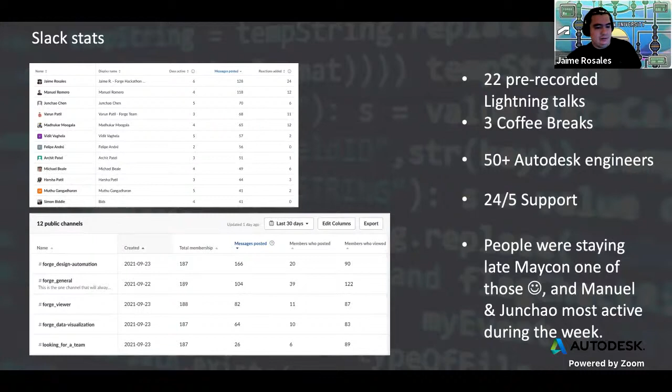Some people were staying late, Maycon being one of those. Maycon is based in Brazil, and I saw him working with Xiaodong, who is on our China team. Good job, Maycon, with that. Also among the most active ones of the week, I saw Manuel Romero and Junchao Chen. They are from the Apogea team. Good job, guys, during this week.

Okay, so a little bit about Demo Day. Demo Day, basically, it's kind of quick and simple. I'm gonna ask — we have around 8 teams presenting today during this time slot — so I'm gonna ask you to keep it short and concise. But the main idea is to introduce your team, your teammates, and at the same time,

the most important one, tell us which challenge you ended up picking for the application you worked on, what you were able to accomplish, what you like and dislike about the hackathon format, and how we can make it better. Don't worry about it, we have tough skin when it comes to this. We'd like to improve every single time we have one of these virtual events. So please let us know what you thought about it.

And then last but not least, a quick demo of your application. I'm going to ask all of you to try to stay ideally within the 5-minute mark. So go directly to the point: tell us your teammates, challenge, demo of the app, and then the rest.

Since this is a competition, you're going to be competing for some prizes. So this is a little quick preview about what prizes we have for the winners today. The winners are not going to be selected today — we're going to go through judging criteria tomorrow with the judges, and then we'll be selecting the next round participants, who are going to be showcased during AU on Tuesday, October the 5th.

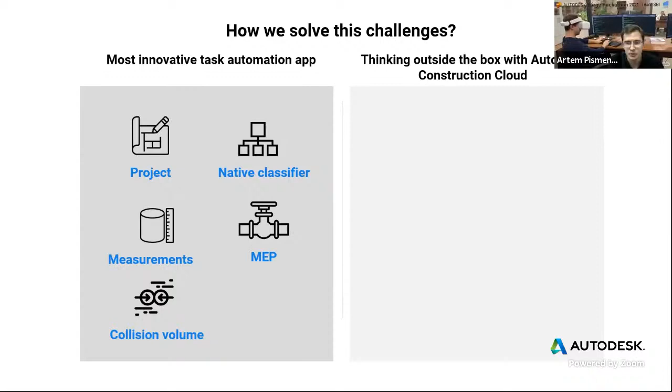We also assign collision parameters such as intersection volume, and the processing creates surfaces to calculate finish by room.

For the second challenge, we developed a tool for comparing consolidated models. It can create consolidated models from the required Revit files and quickly analyze qualitative and quantitative changes between project versions.

To solve our problems, we used the following Autodesk Forge APIs. For backend, there was Revit API, data management, model derivative, and design automation. For frontend, we used Viewer API.

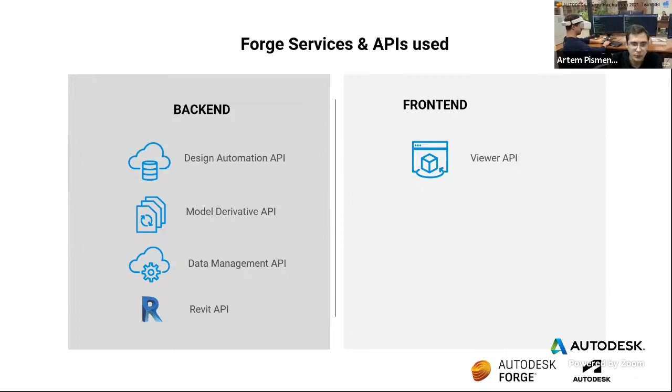Our workflow divides into two stages. In the first stage, the model selected from the source folder in BIM 360 is transferred through the data management API to the design automation API. During this processing, parameters are assigned to the model.

The elements of the model are assigned parameters which are further used to verify the correctness of quantitative parameters and classification of model elements. After processing, the files are placed in the process folder.

In the second step, the selected models with multiple versions in BIM 360 are transferred to the data management API and the model derivative API, which allows the comparison tool to work with metadata and perform comparison. Then comparison results and model data are transferred to the viewer API and dashboard.

Next, we'll show you a demo. We pre-recorded it, so let's start.

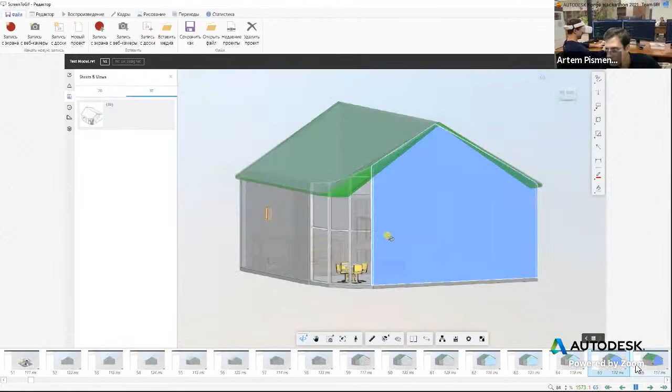So we have a model in the source folder, test RVT, and we're showing you that this model doesn't have any generic models and our parameters.

On different stages, this model doesn't have these elements.

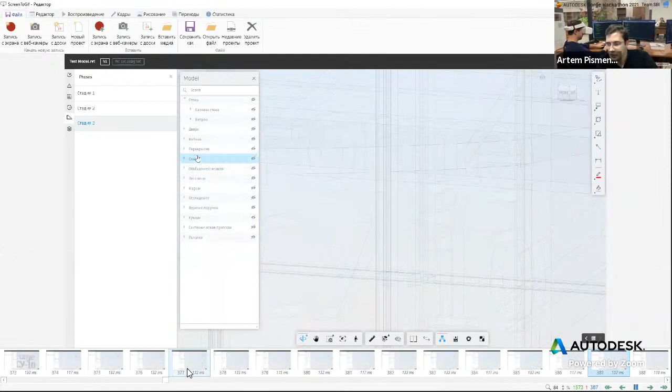So the next step is to start processing. We go to the same folder, pick our model, and start processing.

After a few moments, the process is complete, and we have the processed model in this folder.

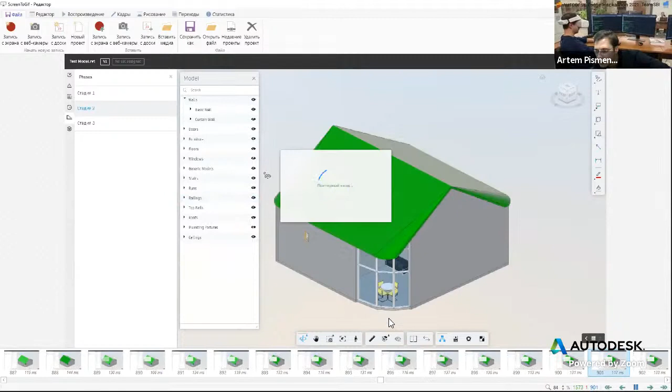And as you can see, on the third stage, we created collision elements which have volume and other parameters.

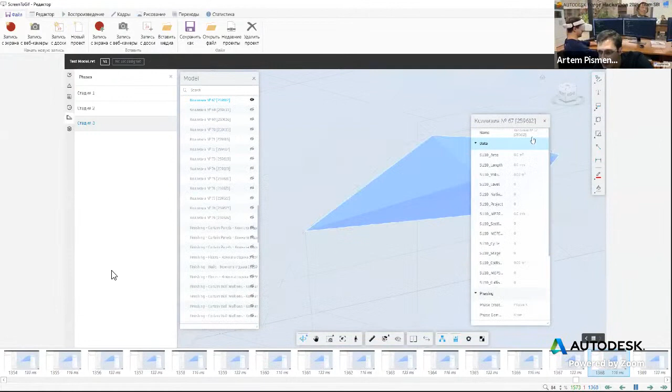Also, we created finishing elements which we can use to create a bill of quantities. So that was the first stage.

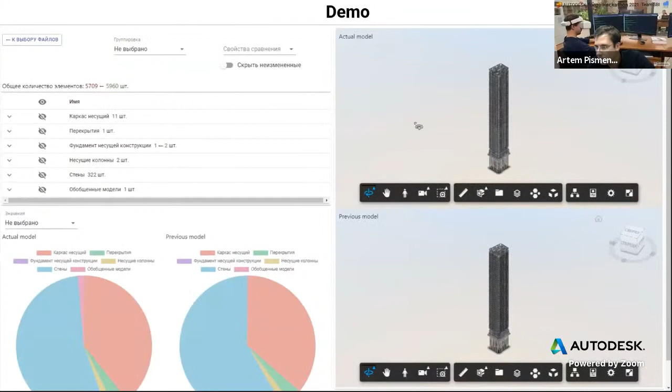At the second stage, we will demonstrate a real project. So we chose two versions, and here it is, our comparison tool.

We chose the volume parameter to show how it increased. We also chose this parameter in the dashboard to modify it.

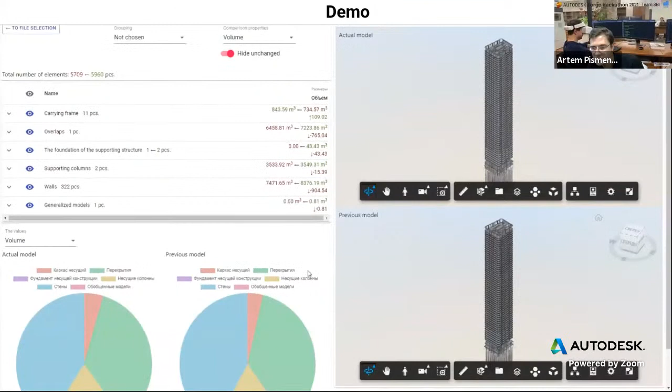As you can see, we have elements that don't change between version 1 and version 2. For this issue, we created a kind of changed filter, so if you click this button, our tool hides all unchanged elements and you can see how the volume of different categories changed.

You can also go to two dimensions and see changes there as well.

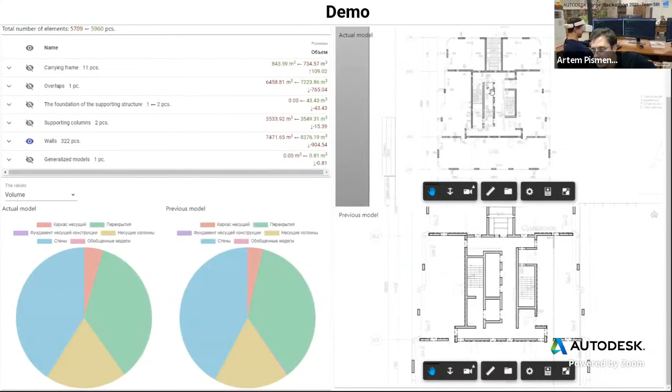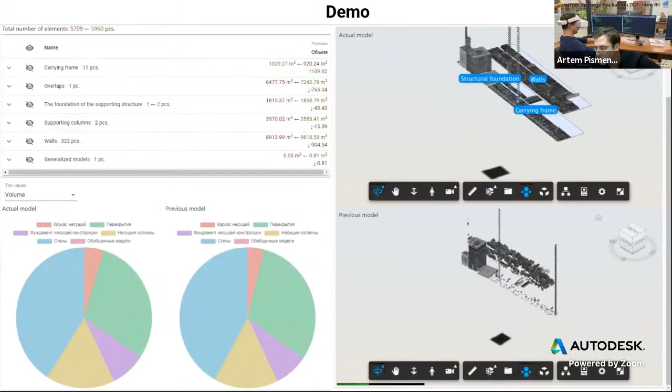We've also added a form cluster function. Using this function, you will be able to correctly identify which elements changed in different categories.

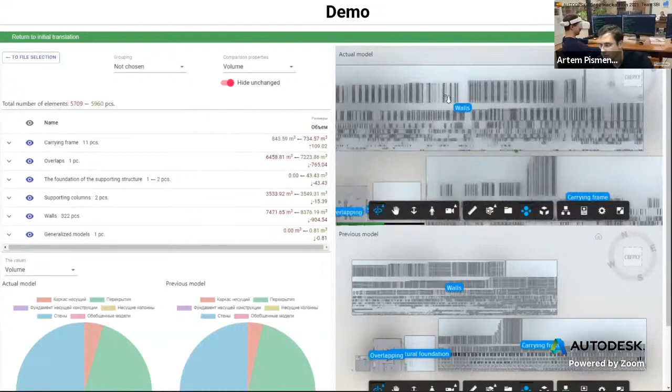The next step will demonstrate how our tool can make merged models from many Revit files. As you can see, there are many files.

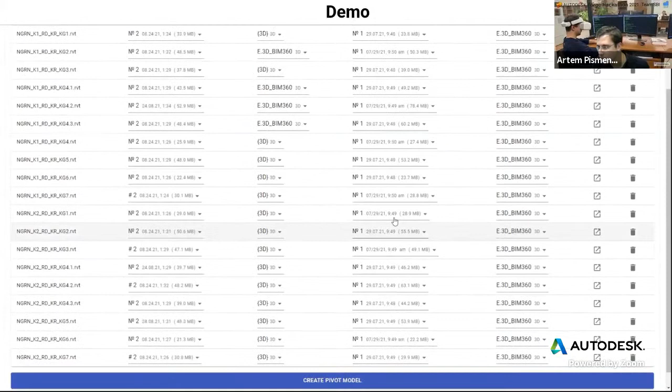Our tool combined them into one solid model, so we'll be able to analyze changes between many models.

There are a lot of elements in this model, so it takes a little time.

Our dashboards are interactive, and if you click on a category on the dashboard, this filter also works in the viewer.

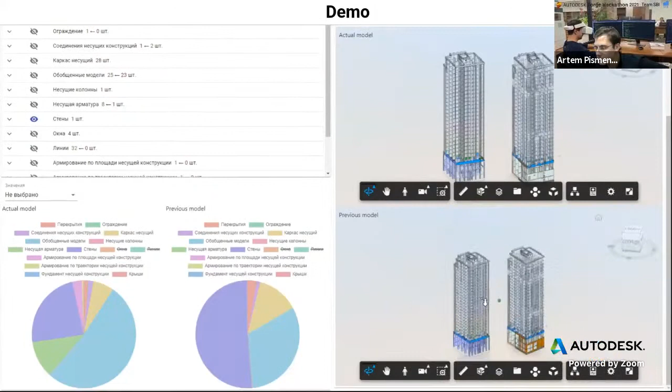You can add multiple data to analyze, and we think it's very useful. So I think the demonstration is finished.

To make this project, we used the following technological stack. For front end, we used JavaScript, Redux plus React, and Autodesk Forge APIs. For backend, we used Node.js and PostgreSQL database. For BIM, we used C#, Revit, and BIM 360. We also used services such as Jira, Slack, Figma, and GitHub.

The problem we're solving is difficult workflows, because it takes a lot of time for the formation of bill of quantities and verification of changes in the project during the tender stage.

Also, we solve the problem of lack of necessary parameters, because at the tender stage, the designer provides a BIM model of the project without necessary parameters, and for correct analysis of the project, we can add them.

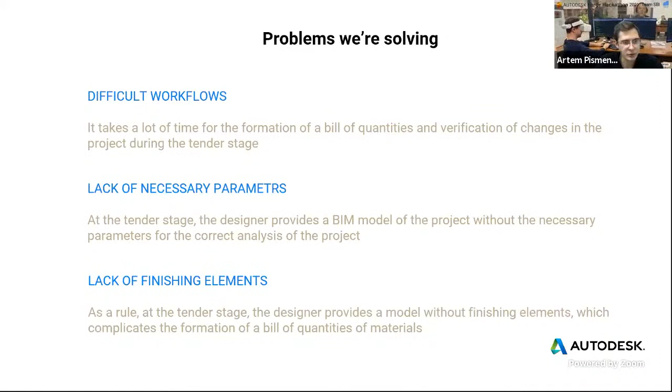Also, we have other benefits like autonomy, because using our tool, you no longer depend on the designer and can form a bill of quantities even if the model doesn't have necessary parameters.

Next benefit is an all-in-one compare tool. Our comparison tool also allows you to analyze both quantitative changes in the volumes for different categories and qualitative changes of a single element. The tool also erases boundaries between 2D blueprints and the BIM model, so you can work as you want.

Last benefit is interactive dashboards, because interactive dashboards built into our service allow you to quickly perform a visual assessment of the quantities relationship between the selected categories and quickly make decisions. Thank you for attention, and we're ready for questions.

Quite a lot in a week. Awesome, Artem, good job. Do we have any questions for Artem?

If people are being bashful, I have a question, Jaime, or for Artem. Go for it. Pardon if this is a little too straightforward. You clearly have done a bunch of work before this week. So how much did you do this week? Because I'll tell you, Artem.

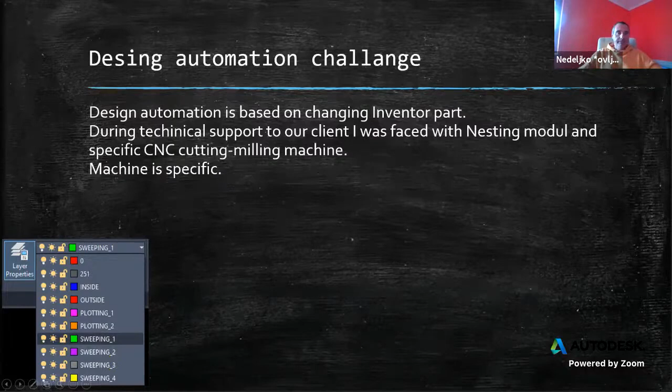On the other side, we have the nesting, which is also specific. It's good, but there are rules that must be obeyed. If you want to nest something on the table, nesting will first search from the bottom and look for the first free sketch. If there is no free sketch, it goes up and looks for the first extrusion, and takes that sketch for the nesting.

In this example, this green sketch is used for that extrusion. It means only that geometry will be taken in nesting. This arc will not be taken, and that is a problem. When you cut, you will cut it here, and that is not what we want.

So this Forge application will be a bridge between these two worlds. So what is the main idea here, and what is the challenge?

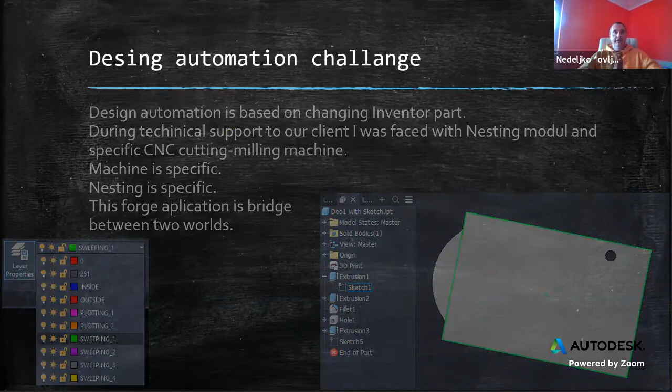A plugin for Inventor is okay, it's not a big deal. For me, it's easy after 10 years of programming and using Inventor. But the challenge is to use a viewer, to allow the CNC operator to use the Forge viewer to pick the edges, select the technology for those edges, and then send that to Forge and receive the complete model data back.

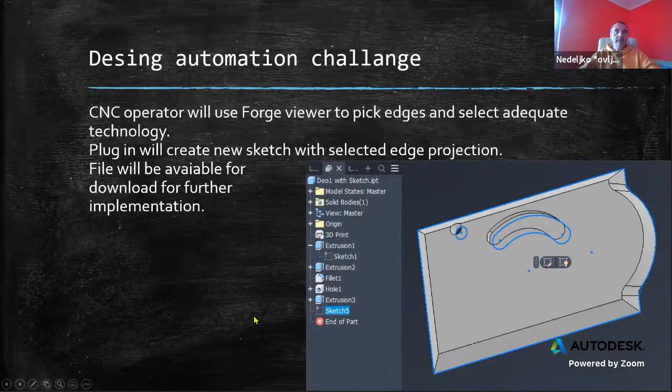So the result must be like that. In this free sketch, this geometry must be projected outside for the sweeping geometry, and this geometry for drilling. So I will start now my application to show what's going on, and my application is here.

So it's very easy, log in. Inside, I will take this project, edge classification config, or we can create a new one, but we will work on this demo project. First, we have to upload the file and extract edges. That will be done on Forge.

Now we have our model. We'll start the translation, I'll just leave it. I should remove it, but it's done better. It's a very simple model and it will be very quick. So this is our model.

Next step is to download the edges, calculate those edges, and we will show those edges here. So the operator needs to recognize edges, and which edges go with which technology.

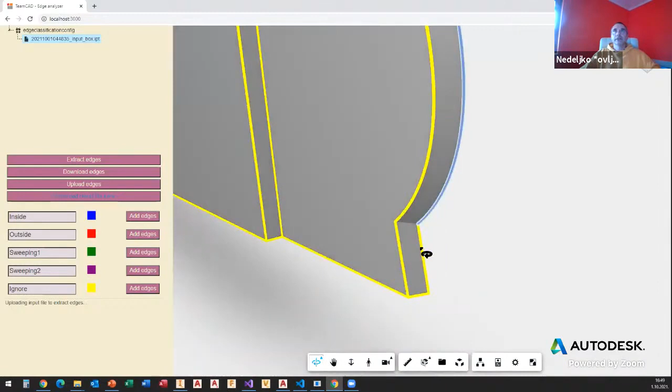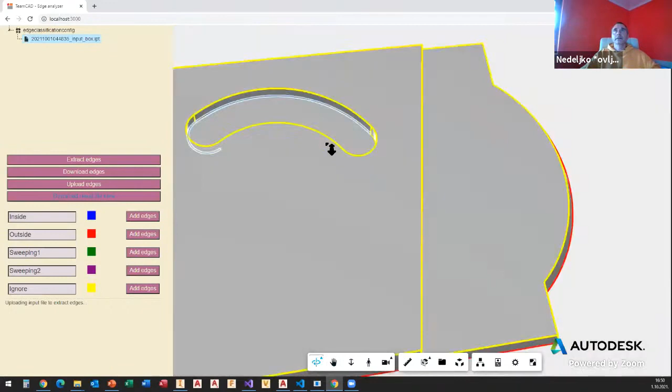We will collect this edge, that edge, that edge, and that should be outside. Another thing, we should collect this edge and take it as an inside edge, and here we will take this edge. This piece here, this one, and that should be sweeping one.

Sweeping one is milling inside that contour, sweeping 1. And here is the last edge or last contour that should be selected. This one and this one, that is sweeping 2.

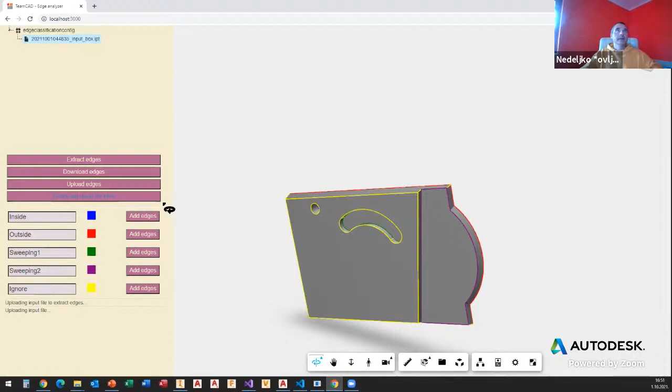Now the model is ready to send back to Forge and create a sketch according to this selection. And here we can download it as a part. I will open it, I should bring my Inventor on top. Open. And this is the last one.

So here is our part, and this is that last sketch with contours. What is important here is the color of these contours, because based on that color, we will create the DXF file and put these contours on the adequate layer.

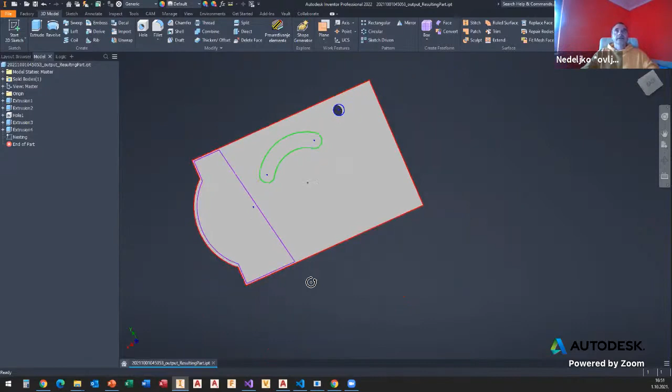So it's very simple now. We will create a nest. I will use millimeters.

Source file, okay, I accept that as a source file. And now I'm going to create nest study.

Nest study is here, 28 pieces, it doesn't matter how much. And here it is. Nesting, just recognize that contour is inside, but it doesn't matter. We will not cut in nesting.

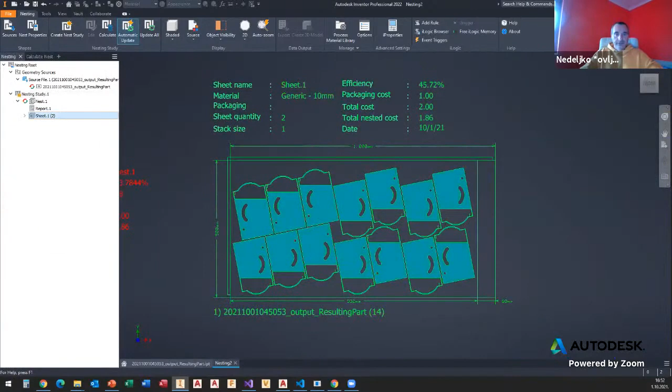We will first go and export this sheet in DXF format, for example, in AutoCAD here. I will use my configuration for that. And that is now exported.

So now it can be opened in AutoCAD. This is that one file. And we'll see each contour kept the color.

That color we will use to put that geometry on the adequate layer. This layer is 0, so should be sweeping 1. For that purpose, I create here a command, and after that...

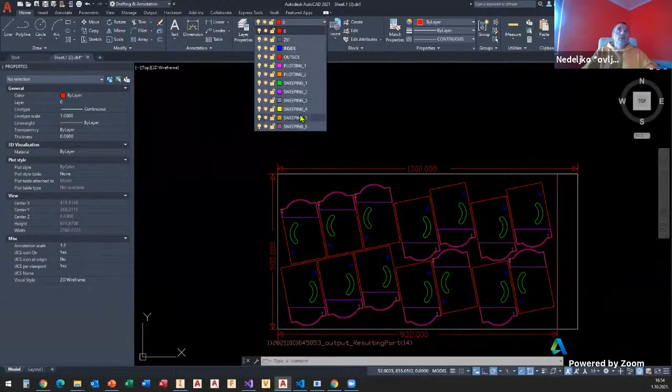Layer manager is down, okay, I can open from here. Now we have all layers, what is necessary for production, and each of these geometries is on the adequate layer.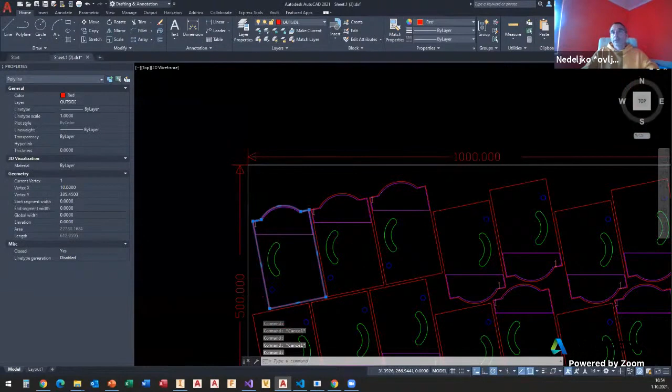Now there is no problem for production, and the machine will understand what sweeping 1 means, what sweeping 2 means, and here is the inside and outside contour, and everything will be perfect, I hope so. We will see, because that is live, that should be integrated to our client, and we will see, I hope, the best.

That's it, what I have to expose here. I want to save the time for others, but if there is some question, I'm open.

There's a mix of different technologies going on here, which is actually quite interesting. Do we have any questions for Nedeljko?

I have one. Can you hear me? Yeah, yes, I can hear you. Login based on Forge Client ID and secret - is that just for demo, or do you plan to use that? It's two-legged authentication. Yes.

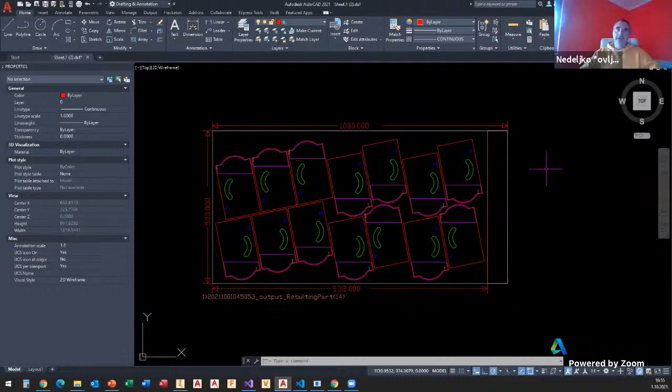So you cannot take the model from Fusion because our client doesn't use Fusion, and this is only Inventor oriented. All right.

Okay, awesome. Any other question? Yeah, I mean, I'll ask what Jim asked last time. So just to be clear, what did you have going in, and which pieces did you build out during the week?

During this week, I prepared that plugin for the Inventor and that small macro for the AutoCAD. But AutoCAD is out of the Forge. It works locally on the machine, on that machine where the CNC machine is, the operator has his own license for AutoCAD. That is not Forge.

And that UI is done by me because my developer caught the virus, not dramatically, but she's feeling bad. So I hope my interface is not too ugly because I'm not a front-end developer, and I hope it's good.

Okay, I think for a week it's actually quite nice. Yeah, thank you. Do we have any other questions?

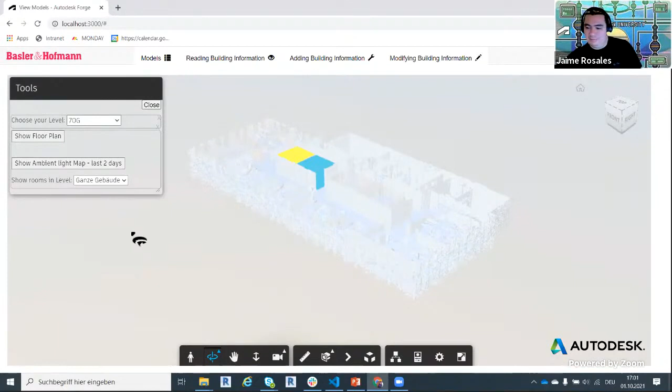Awesome, thank you. Do we have any questions for Mahshid? Yes, from my side, congratulations, because I really like this topic, the digital twin applied to existing buildings. I think it's a good topic, especially now, and especially in Italy. Can I ask you how much work you did before the hackathon, and how much you ended up doing these days?

Most of the functions for the static data I did before. Of course they all needed debugging and reconfiguration to match the dynamic data I added during this week, matching them together to function—this panel was a mess, so I cleaned up everything. But most of the static data functions I had before, and during this week I focused on the dynamic part, setting up the sensors, registering them for the database, and receiving data from the database.

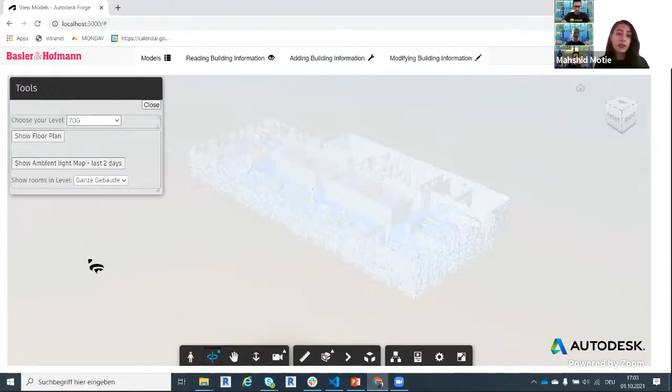Good, Mahshid. Jim here—I'm curious how hard it was to take the model, the mesh, which is pretty dumb, and get it oriented and scaled correctly, so you could do those floors. You kind of need that, right? But as I showed, it's all manual adding by the user. The user can say, okay, I want to add a level, then select a surface of the mesh which shows the elevation, and that becomes the level. Then I just cut the planes.

So the mesh comes in without having to worry about what's up, what's down, what's east, west, north, south. It knows nothing—it only has X, Y, Z coordinates. Okay, thank you.

Awesome, I think Artem, you have a question. Yeah, you can ask. Artem? Oh sorry, hello. I want to ask which devices were used to create the point cloud and mesh.

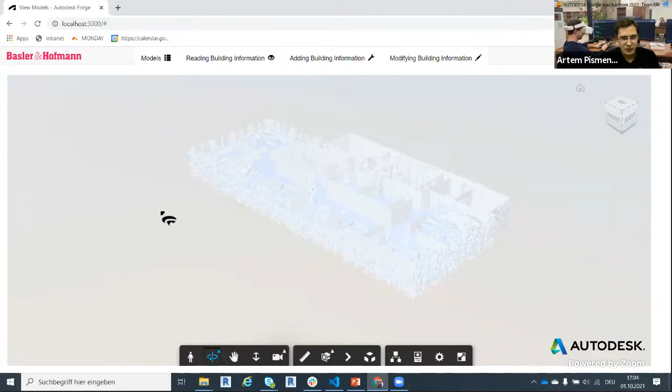And how heavy is this model, how many gigabytes? So the devices for point cloud scanning—we used the BLK2Go, and for indoor and outdoor, a drone was used. Then the point clouds are registered together, and the mesh is created from that. But the size of the model depends on the quality of the mesh you create—it can be too much or too low.

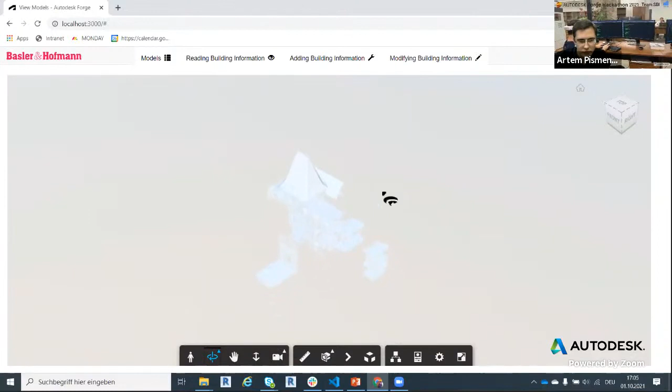This one I don't know, but we do have other models up to 2.5 gigabytes. I'm just interested how large a model the Forge viewer can display—this is very interesting. This one actually shouldn't display like this, it should be faster, but we have other models that lag. It's especially worse when I'm sharing the screen and presenting, because the internet doesn't let it load better.

Just as an aside, the viewer doesn't have any built-in size limit. I know I've seen things up to 10 gigabytes, but maybe that's not a good user experience. Nice, thank you.

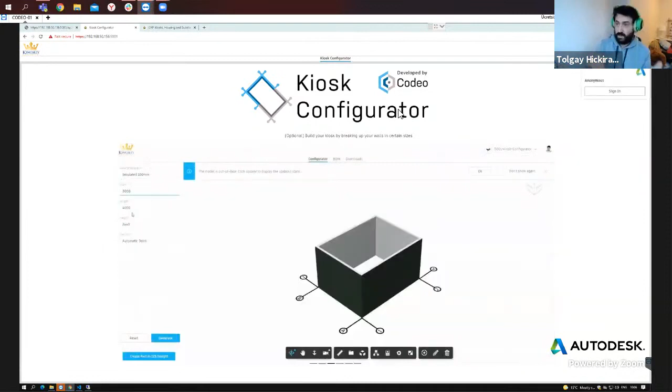We are using Forge Design Automation as a basic tool, and all the models you're going to see here were created under Inventor.

So we have a very simple screen at the beginning. We can start creating with different wall construction types. Hamdi, can you show me the options, standard construction. We can use different construction types, insulation types, etc. Anything is good, and then we can create the length, width, and height of the construction type here.

The beautiful thing about this is we can do manual joints. Most of the time, customers do manual panel fittings here, so we can create multiple panels from the instructions we give. So Hamdi put 4,000 by 4,000, 2,000 by 2,000 by 2,000, meaning we're going to have 6 different walls here with these joints.

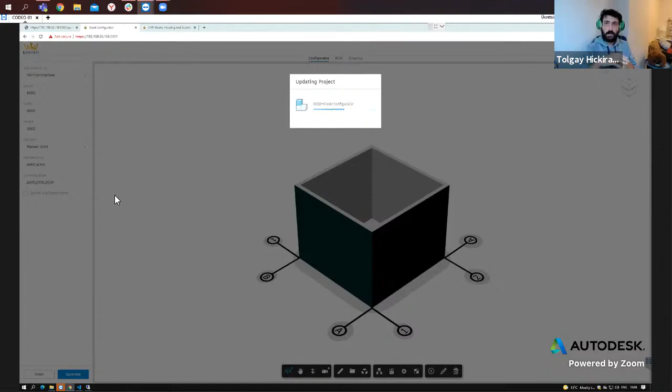So this is live, by the way, using Forge at the moment. It takes around 30 seconds to build this. The reason we created a configurator like this is it's pretty cheap for us to use as a sales tool, but we also have a manufacturing side of things which only works on Inventor. So all the stuff you're seeing here is for creating precise pricing and also part numbering.

So after we create the kiosk, as you can see, 2 walls on one side, 3 walls on the other side, so we partition the walls like this. And if you look at the bottom part, you can see the numbers and letters so we know what wall we're working on.

We have the ability to add doors. We had these already, let's just add some door. We can center the doors, and we can move around everything that we add to the model, from the bottom side, from the left side, taking into reference that particular wall.

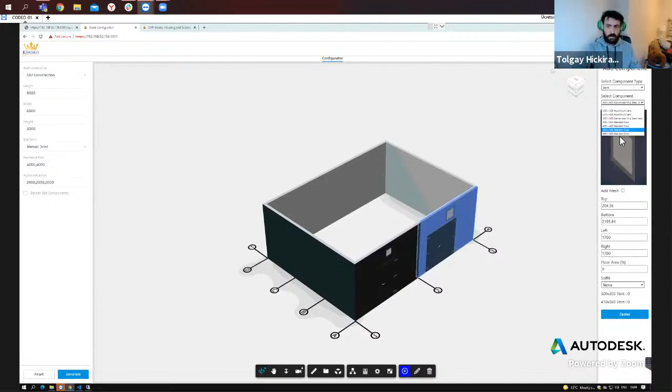We can add meshes. The meshes might have more bill of materials inside, so we have extra vent meshes inside, etc. All these options are coming from a static list, but we have the ability to also read from ERPs.

So let's create one kiosk, and then the first thing we did this week, which is going to be the door configurator, we are going to create a custom door, and we are going to show you how that works.

So what we are trying to create here is like a project we are doing with a customer, but we are also learning a lot from this project, because we have found a lot of different ways to manipulate the current workflows in Forge, basically design automation. We are trying to come up with creative ideas, etc., and I think we learned a lot.

So we're going to put this into something much more useful. Like last year, we were presenting you 3D catalogs, now we are automating that 100%. So it's going to become a sold product for all over the world, etc. We are trying to create the same logic here, but not yet, of course. So everything here is created under design automation now, all the bill of materials, etc.

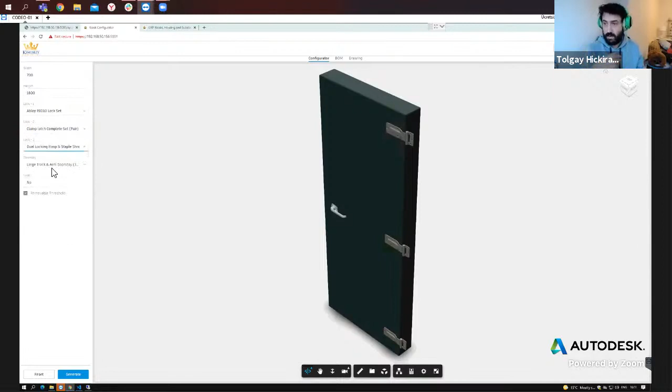As you can see, we have a lot of different lock types. This is obviously coming from the customer's database again. So do we want to seal this or not, etc. So this is a custom bespoke door now, probably not really generated before on the customer side. So after creating such an item, we need to put this on a list so that the customer can order it from their ERP system. So then we create a door like this, and we add the custom door just by naming something. This goes to the original form as an added door, basically.

As you can see here, what happens is that we are using the model derivative to create the actual output. Generation is not done yet. We are just waiting for it.

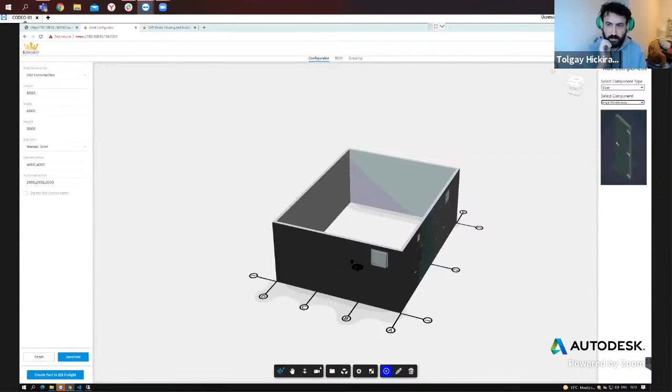Okay, so it's added. We're going to go back to the original document now, and now we can add the bespoke door to the kiosk. So let's do that. So this is the bespoke door that we just created. This is being added. Let's just add a couple more items, etc., and then we can press generate again.

So the first thing that we did, like I said, was design automation of a door configurator, as well as adding this to the current list of doors that we have as standard.

Let's see if it's working. Probably gonna take around 30 seconds again. We obviously want to do this without creating a sales automation, because everyone wants to end up with a real output. But obviously with Forge, we need to work smart, get all the processes as lean as possible. So that's why we're creating a sales configurator rather than a manufacturing or design configurator at the start.

As you can see, this is not a real model, this is just a placeholder model. It has all the necessary dimensions and all the necessary bill of materials. Everything is real, but not the looks, obviously.

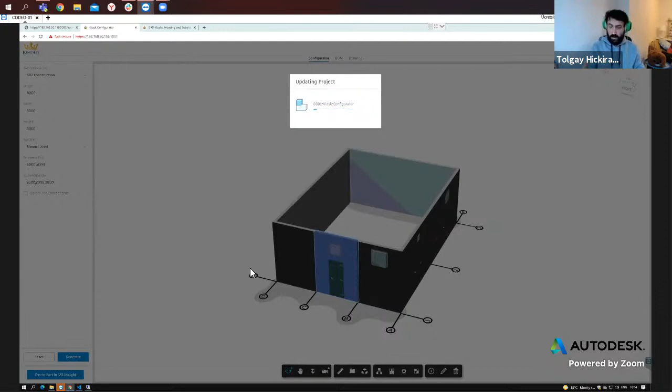And we obviously lack some CAM outputs. The customer, for example, is using a robot that creates all the walls automatically. That doesn't come from here, it comes from Inventor.

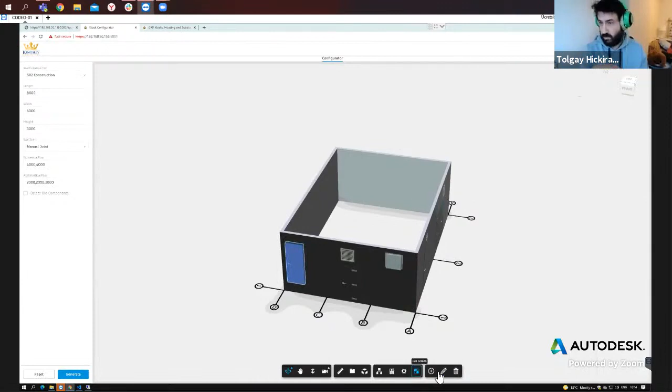Let's just, yeah, so what we can do also, we created 2 different additional elements here to edit the components and delete the components. Obviously this is just working at the moment before you do the generation. So after we generate, it becomes one model. So it's a bit of a different approach that we're doing — we are adding in models and then grabbing everything inside to create just one simple model.

Okay, let's just go on, Hamdi. At the bill of materials, we didn't have the pricing ready. So here you can see all the API calls that are coming from the ERP side, and then all the pricing comes. The actual pricing is coming from the ERP side. We can see what we have used, part numbers, how many, quantities, etc., unit of measure. Next step is going to be adding the labor costs as well over here.

What we have done here is a total drawing automation. So whenever we add something to the drawing, like a vent or a door, we are adding what's called an attribute set. Okay, it's coming, just a sec. The attribute set is being added, and then we are taking 4 different dimensions and realigning and resizing everything to fit into one drawing.

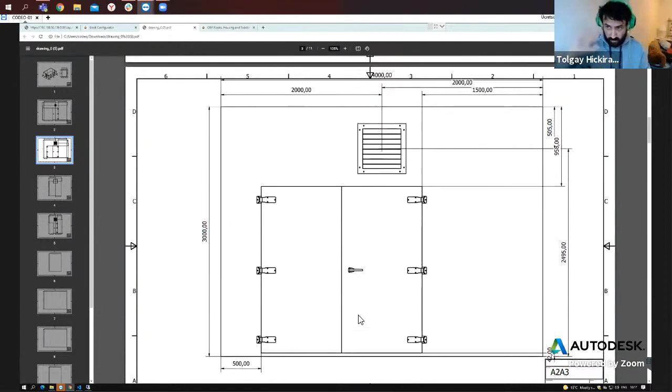So here we can see all the different items that are created. If you go down, Hamdi, as you can see, the part number is also being created on the drawing. Everything is here. Some of the parts are taking references from the middle, like the vent, and some of the parts are taking the reference from the edges. And for every single wall, we are creating a drawing document.

And I'm pretty impressed, to be honest, by the speed of this, because imagine this is going to be used for salespeople, and they need to be very fast about this. So it created a drawing in like 15 seconds or something. This is very simple stuff, etc. This can be shared with the customer, and then they can talk about it and sign off the agreement.

And lastly, of course, we are creating the part — this is the integration part. We are creating the part, not the part — this ERP is calling it part, but it's actually the assembly.

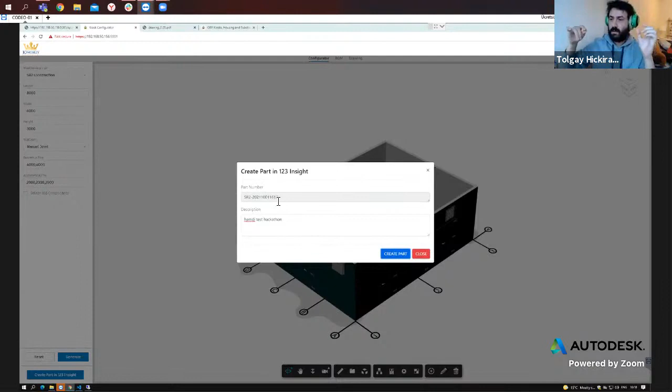So we are creating the main level assembly on the enterprise resource planning software. This bit is also done this week. This tells you that some of the parts are not inside this database, so you either need to go there and put these up. This could also be that the part is there, but there's no pricing, so obviously we need to be precise about pricing here. But as you can see, this is the customer's ERP system.

We just created this part, and all the bill of materials are generated automatically after we create the part. So construction wall types, different doors that we create, all the necessary paint, timber, plywood, whatever we're using is also being generated. So it's not 100% BOM list, but it's very near to the real count. We are basically creating a part, an assembly that has real value, real pricing, and it's integrated with the ERP system. So I'm just gonna build this now, so we can start building it.

So this is what we did: ERP integration, drawing automation, and door configurator. But otherwise, the other parts were created before.

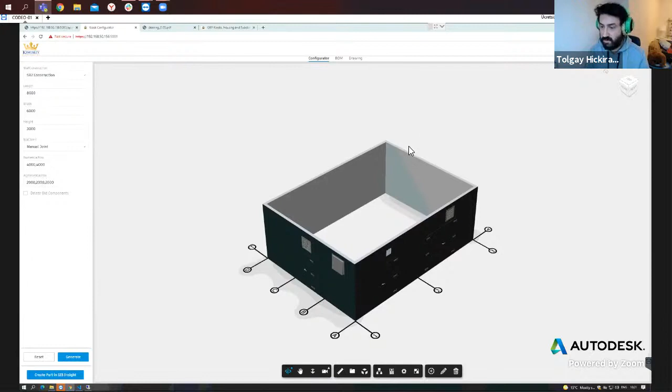So yeah, the plan is actually to create multiple Forge applications that could be used worldwide, maybe with lower pricing structures. Integrated sales and manufacturing is some of the steps we are focusing on. Since the team we have, especially Kivanch, who is our other co-founder, are very much experienced in manufacturing, but we are also now experienced in software, what we tend to do is go to companies, watch what they do, etc. We process automate them, we try to create lean manufacturing sites. So we are always looking out for bigger and better opportunities. But yeah, we definitely need to create a couple applications that could be used out of the box, and then sold to many customers.

All right, I've got a quick question. It looks like all of the pieces that you had going into this—is it fair to say that you just leveraged more of the pieces you'd already done, a lot with the viewer, a lot with the model derivative and that kind of thing? What were some of the things that you learned that were new, or did you just expand what you already knew how to do and apply it more?

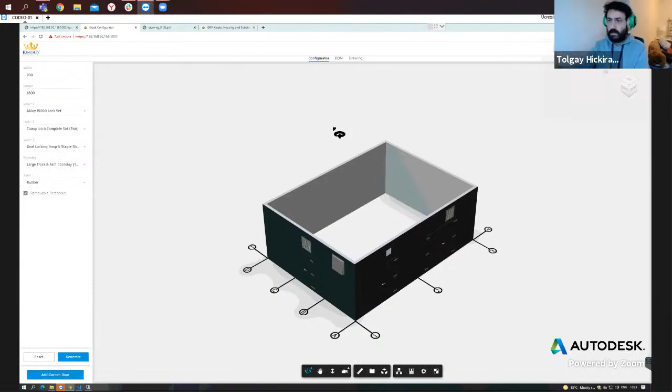Sure, so I think what we worked on most of the time this week at least was the door configurator integration, because as you can see, the applications are working in a different way. We have two different models loaded in, and then we are generating a door. We are putting this into a list, and then deciding if we want to create this as a list or not. Afterwards we create it, and it's rather interesting how we learned to create a model when we have a session open, while at the same time having two different models open on the same screen, going backwards and forwards to create doors, going backwards, adding a door, again going backwards.

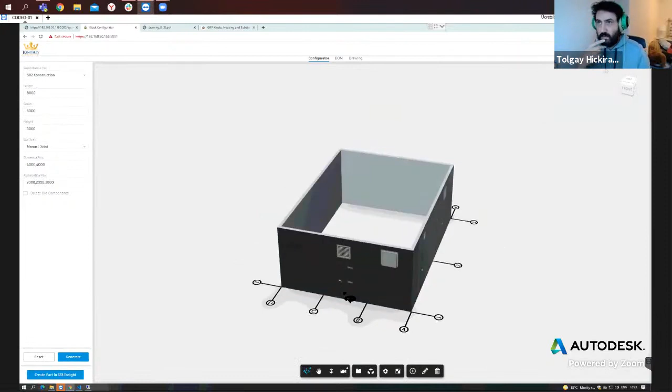This was some type of a design decision that we made during this week. We thought, okay, I think we should be very fast about this, so let's just use it this way. But I can definitely tell you that over a longer time period, probably we wouldn't be doing it this way. We would probably do it in a different way, fairly different, let's say, door configuration creation.

Well, still very impressive. Thanks.

Any other questions for the Codeo team? Nope. All right. I just want to say something. There is one. Is there? I just want to say something first. So all the soccer players, they shoot and score and they kiss their badges. I wanna kiss my expert elite badge. Good.

Juan, do you have a question? Well, I just want to say that this is very impressive. So congratulations, and thank you, guys. I want to ask you something, if you have any similar approach but working with Revit or fabrication parts.

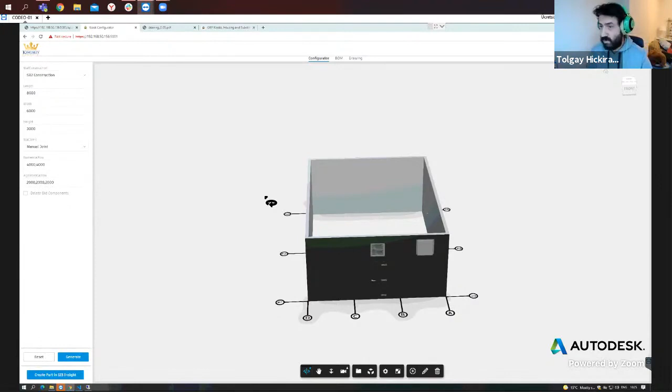Unlucky for us, as co-founders, we didn't have any civil engineers or architects. Lucky for me, my father-in-law is an architect. He's not been working for 15 years. I'm trying to get him to start working again, so that we can actually learn from an architect, and then we can enter these type of applications. But to talk about it precisely, I'm not an architect, Kevanch is not an architect, we don't have any architects. I think we need an architect or a civil engineer to be talking about applications in construction. So we definitely have plans, but at the moment we don't have enough manpower.

Okay, thank you. No worries.

Awesome. Well, if there are no other questions, can I ask at least someone else to join me on the applause, in order not to just have my wife think that I'm crazy? All right. Well, thank you so much. Thanks, guys. Thank you. All right.

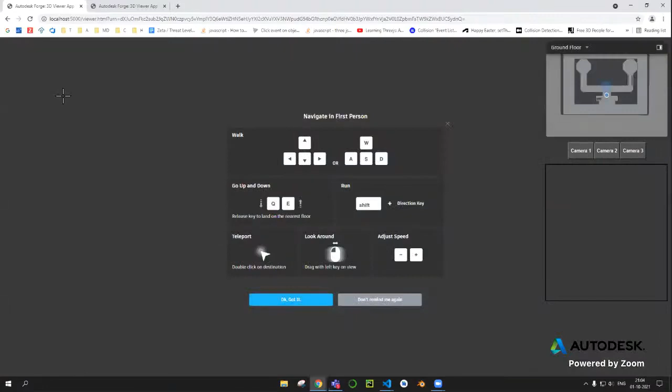So how this works is the game starts, and we are in the airport. We're supposed to safeguard Kevin, and we are in the security office. There's the task: suspicious activity number 1. We've given the player a map to see where he is and where the cameras are.

So the first camera is over there, and the activity is supposed to be there. The player has to go there and see. We have a staged, static activity at that camera, and the player has to come here, interact with the activity, and analyze if this is a potential security threat to Kevin, who is on the other side of the airport.

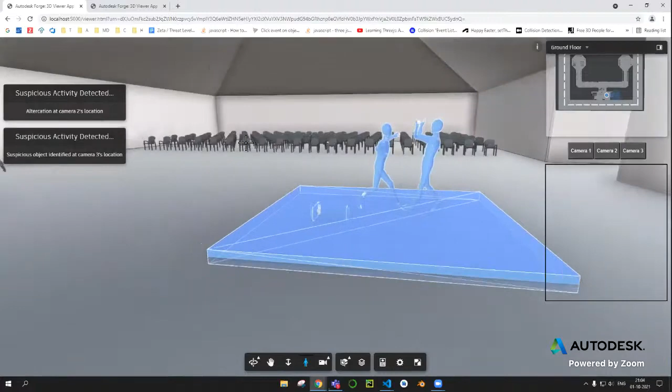So we can safely say that these people who are fighting for some reason do not pose a threat, so we say no. The second camera was located on that side, so we'll have to go there, probably running.

I hope my screen is not distorting too much. This is the second activity over here - suspicious activity where some kids are playing, good times. So again we can say it's not a potential security threat.

Finally, the third activity is at camera 3's location, so we'll go there. You can see 3 people over here, and Kevin with his bodyguards in all his glory. So again we go here and select this, and since this is very close to Kevin we assume this is a potential threat.

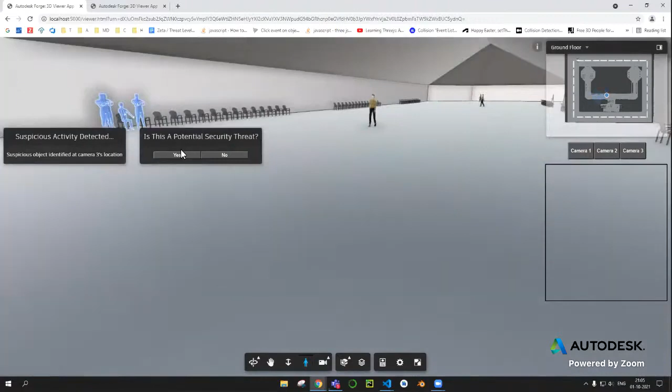So we have to analyze and see which one of these would be a threat. We can clearly see this is a mother and a child and some person, but there is some suspicious object here in this lady's folder, I guess - she is carrying a gun. So we select her and nullify the threat.

Hence we kept Dr. Kevin safe, and made all the right decisions on all the tasks. We get some fame, Kevin's famous chili, if anyone gets the reference. That's the game. The camera views for all the cameras were something we couldn't fully implement into our main game - we had the attachment for it, but while integrating there were issues and errors with our gameplay, so we couldn't integrate it properly.

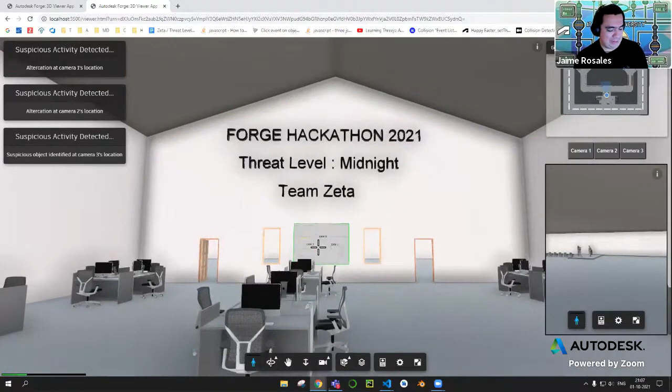So I'm a big fan of The Office, and that was kind of like the approach. I also remember growing up around computers because of my dad, so I used to play Wolfenstein, and this gave me that throwback feeling of going through doors and finding different threats. If I can make a request for version 2, maybe we could get some not very harmful weapons to use or something like that. But yeah, this is actually pretty cool. Actually, Jaime, sorry, go ahead.

Yeah, I was just saying, when we started out there were loads of ideas thrown around. Since all of us were completely new to Forge, we didn't know how many restrictions it had. So we were thinking we'd make something like Call of Duty, where we have to save Kevin and transport him to a safe location.

But we quickly realized that it wouldn't be possible in a week for us, especially. So this is the basic version plus a couple of features we came up with. We also had animations and such in the pipeline, but unfortunately, I don't think we could have completed it in this time. Maybe with a little bit more time.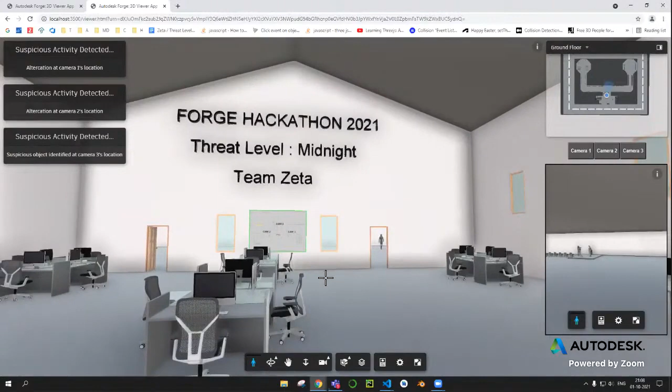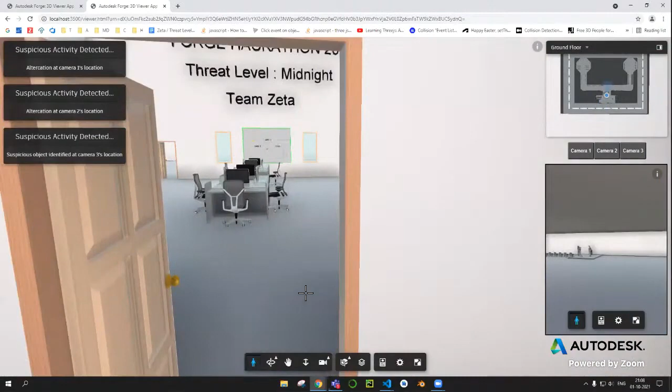I would also ask for some textures of Michael Scott, maybe on some of those. Yeah, actually, the player's name would be Michael Scott. We add him in the front office here in the map zone, and he can act as a distraction here. The office is ready over here, and the co-manager Jim is over here. I love it, it's awesome, and the player is Michael Scott.

Do we have any other questions for Team Zeta?

Yeah, also this is Vera. I like a lot the idea of a sort of gamification, like a possible training also for staff. So it could be used as a tool for training if you want to develop this game more.

Interesting, thank you. Any other questions for Team Zeta?

Seeing a game, it's actually pretty cool. Finally, all we would like to say is that this has been a great experience, and lots of love from India and CCTech. Thank you.

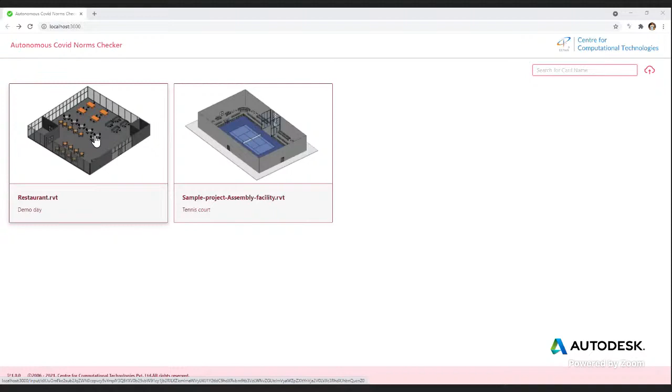So here we can see that we have also given the feature of uploading the model. For the time being, we are using the pre-uploaded model. I'm going to use this restaurant model for a quick demo. I would also like to add that the user can also upload his own models and see that model in the gallery.

After selecting the model, you will see this window with the rules we are going to use for this demo. The first rule is the occupant sitting space rule, which states that the distance between occupant seats should be more than 6 feet in order to reduce the spread.

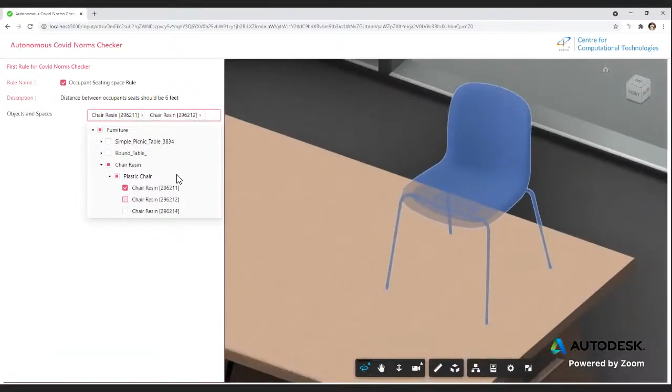I'm going to select this rule, and for this purpose, select the objects on which this rule needs to be run. I'm going to select some of the chairs randomly. As you can see, I'm selecting the model, selecting the chairs, and they are getting highlighted on the model.

So I'm selecting it randomly. The next step is to select the next rule, which is the table space rule, which says that the distance between tables should be minimum 1 meter in order to avoid the spread. I am going to select this rule and also select the objects we are going to check this rule on, these tables and also some other tables.

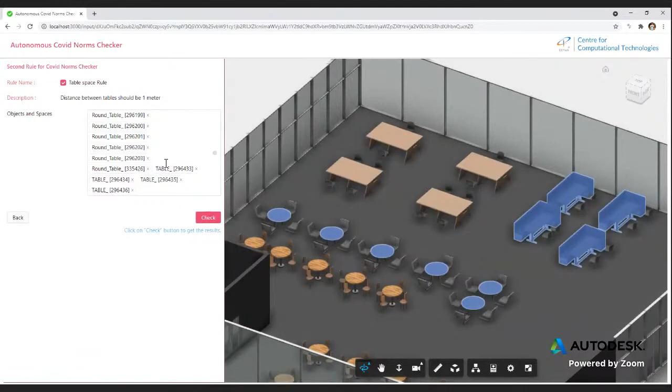As we have selected the rules, the next step is to check the rules on these objects. I am going to click on this Check, and it will check the norms on these selected objects. For this purpose, we are running a design automation job on the selected COVID norms and selected objects. We have used several Forge services like authentication, design automation for Revit, data management, viewer, and model derivative services. It will take some time.

Just wait for a few seconds. I think we should have design automation play some music when this happens.

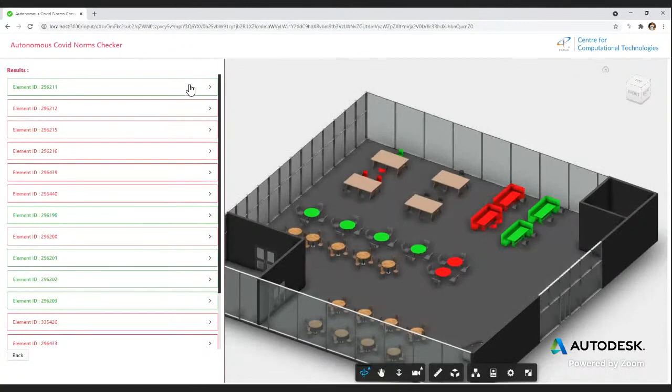Oh good, it's done. Here you can see that the pass case results are showing in green and fail case results are showing in red on the complete model. For an individual object, you can select it by highlighting that object.

This is the pass case result and this is the fail case result. As we can see from the model, this chair is close to these two chairs, that is why it is failing. But if we check this chair, it is far from this chair, at 6 feet distance.

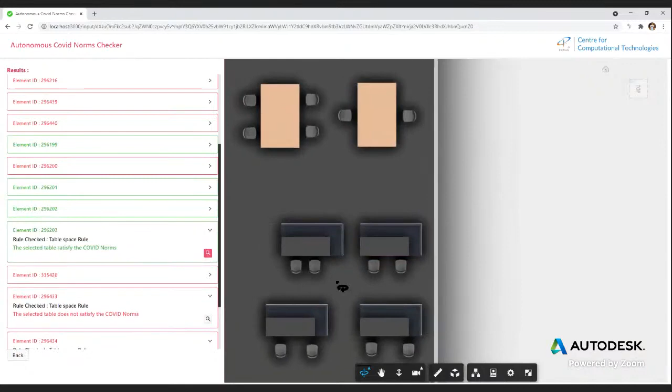In the case of tables, we can see that this table and this table failed, as they are placed too closely. Also, for the pass case table, these are the case of pass, as these are properly spaced.

You just meant to say that there is no other table in the proximity range of 1 meter, so it satisfies the COVID norm. So this was the pass case, and the other one is the fail case. This was the design automation app we have just performed.

Yes, that is it for the demo, yeah. This was the demo, yes.

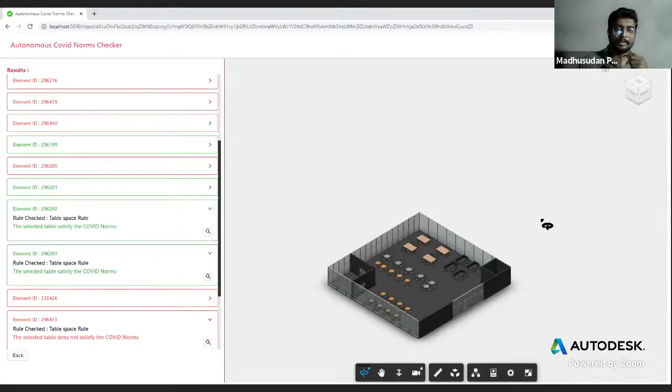It's quite interesting, I can see that it would be quite useful in a city where I live, like New York City, where the spaces are quite small and tables are actually quite close to each other. With this new kind of approach, definitely something like this will benefit. So good job with that.

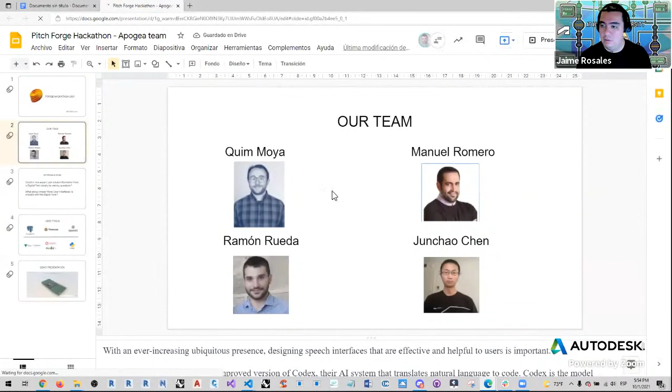The only thing is I cannot hear you, whoever is presenting. Now, now I can. Yes, now I can, okay. So, well, I cannot activate the video. I'm not sure why, give me one second. I can help you out with that. You should be able now. Yeah? Yeah, awesome, okay perfect.

So I'm going to present first of all our team. Our team is 4 members: Manuel Romero, Ramon Rueda, and Junchao Chen, who have been developing everything. Everything you're going to see is their magic. Good job, and I have been giving some support to them to help them.

So what's the point of our project? We were challenging ourselves in the application for digital twins. So the question is, could an expert user obtain information from a digital twin simply by asking questions? What about creating a voice user interface to interact with the digital twin? Essentially, we are trying to get an easier way to communicate with the information of our BIM model. So what have we done?

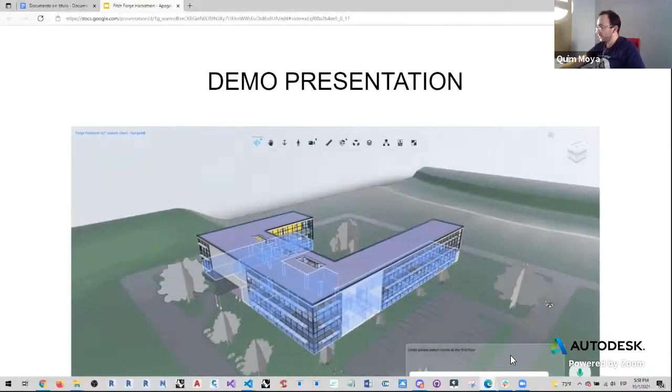First of all, go here. So, for example, let's take the example that I want to obtain what are the walls with a volume greater than 20.

This time I'm still not speaking because we can make some queries by voice, but there are other queries that the system is not able to translate the voice into text properly. So only some queries will be done by voice. But we hope that somehow we can solve this problem. So this is just a written request.

And the system is going to return all the objects that have this condition. Let us see, because in this case we have just one property, this volume, that is being shown. But what happens if we ask, for example, sum all the volumes of all walls? This is not a property that is inside the database, but something the system must generate. So is it able to do that?

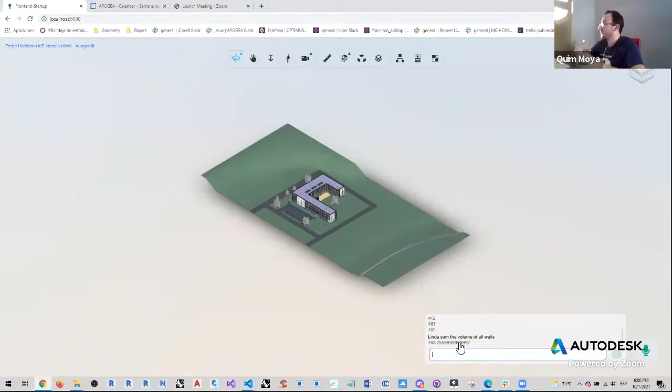That's a question. Sometimes I have to refresh. But yes, it had been able to put the volume of all the walls all together. So it's showing a property that is not just directly showing one value, but adding some values, generating something new. I'm going to refresh because it's sometimes exploding.

Okay, we can try something by voice. This is what I'm going to do now. I'm going to make a query to the database using my voice. So I hope everything will work fine. Hope that the same words I say is what we will see in the text. So I say...

Linda, select the rooms in the first floor. Wait a moment. Okay, it did it. The only problem, well, we see 'Selleck', so it's not exactly select, but by the context the system, the OpenAI system, is able to understand that I'm not saying the name Selleck, but the action of select. So it's even able to solve our own mistakes when we are speaking.

But in this case we know it works. So, for example, I can repeat it with the rooms in the second floor. Linda, select the rooms in the second floor. Well, this time it doesn't work, as you see. But more or less it's able to understand that it's difficult. We're still having a lot of problems with this translation, but we hope to solve this problem.

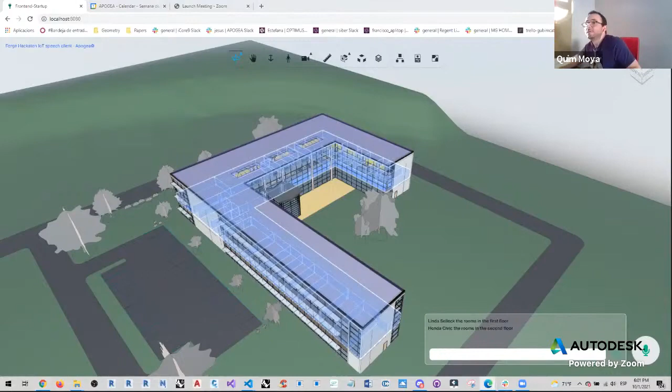And well, of course, let me refresh. More than two questions is too much. So, for example, if we want to select one specific room, of course it's possible.

So you see, I have selected exactly one room. Here it is, right? Or, well, at this point we can make other queries like isolate the walls with volume greater than 10.

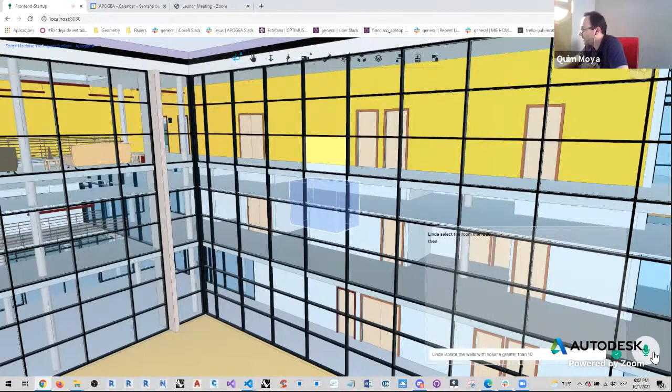Okay, wait, sorry, no, I'll take the voice. Now I'm going to refresh and paste the word again. So, well, we are still having some problems converting these IDs to objects in the really selected objects.

It's not this object, right? But these IDs are correct. So we know it works. This is very important for us. Of course we have still some technical problems because the time is what it is, but we know that these IDs are correct. We have verified it in the database. So we are happy because it's starting to work.

Of course there is still a lot of work to do. And, well, from this point, I don't know if my teammates can maybe show some of the SQL conversions, or if you have any questions, we are open.

Okay, do we have any questions for the Apogea team? If nothing, Mikako has a question. Yeah, yeah, this is interesting.